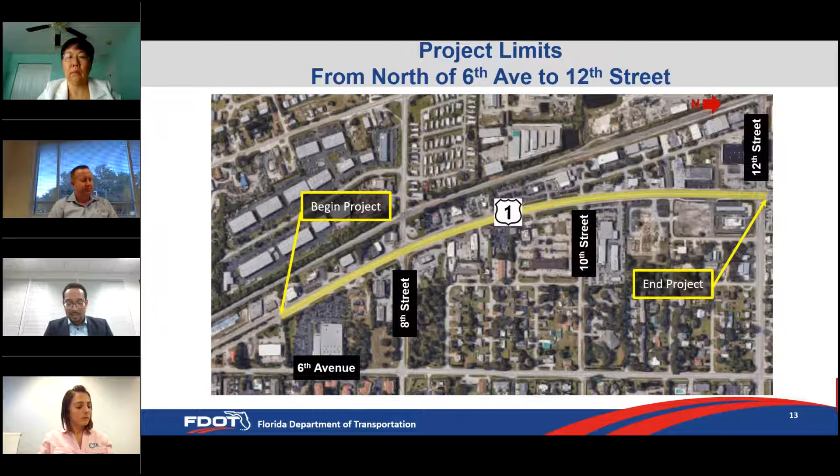So we're now on slide number 13, and this slide shows the project limits along US 1, or State Road 5, in Indian River County. The project begins just north of the intersection with 6th Avenue and ends at the intersection with 12th Street.

Okay, slide number 14. We'll give a brief overview of the project objective and some background information here. The main purpose of this project is to preserve and extend the service life of the roadway by milling and resurfacing the existing pavement, as well as to enhance general highway safety. The project objectives also include necessary pedestrian modifications to comply with the Americans with Disabilities Act (ADA) standards, addition of missing sidewalk, improvement of bike lanes, signals, and lighting upgrades.

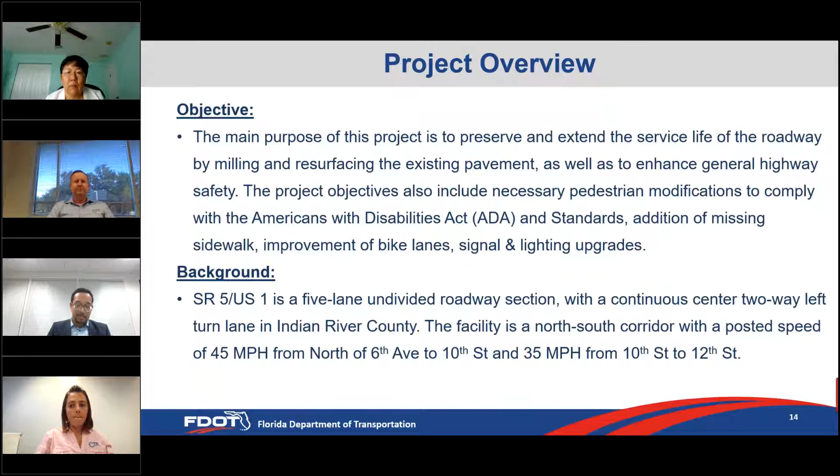A little bit about the background. Within this project section of US 1, it is considered a 5-lane undivided roadway. It has 2 northbound lanes and 2 southbound lanes, and also 1 center lane that is used for left turn movements for both directions. The roadway facility runs from north to south and has a posted speed of 45 miles per hour between 6th Avenue and 10th Street, and then it reduces to 35 miles per hour between 10th Street and 12th Street. Next slide, please.

So we're now on slide number 16. Before I begin, the project is broken up into 2 sections: one from 6th Avenue to 10th Street, which we'll talk about now, and then we'll talk about the second section between 10th Street and 12th Street.

So this section of US 1 between 6th Avenue and 10th Street, the existing roadway has 2 12-foot wide northbound lanes. It also has 2 12-foot wide southbound lanes, and 1 12-foot wide center two-way left turn lane. There's existing 4-foot paved shoulders in both directions, and there's also a grass swale on either side of the roadway. In this section, there are some sidewalks that are 5 feet wide, but there are also several gaps where sidewalks are missing.

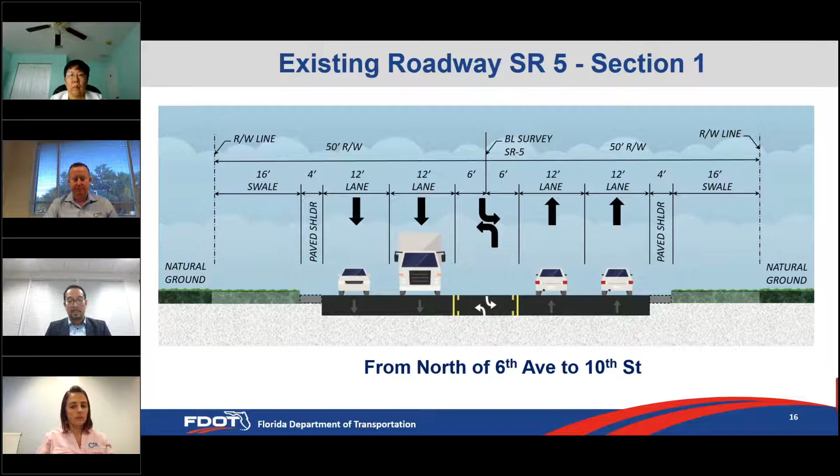So we're now on slide number 18, and we're going to talk about the second section of US 1 in this project, which is from 10th Street to 12th Street. The existing section has two northbound lanes where the inside lane is currently 11 feet wide and the outside lane is 13.5 feet wide. It's the same setup for the southbound direction, with one inside lane that's 11 feet wide and a 13.5 foot wide outside lane.

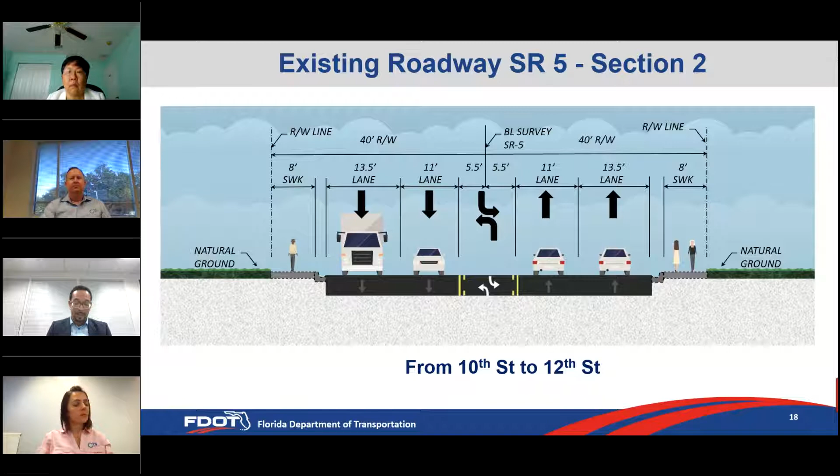This section of US 1 also has a center two-way left turn lane, which is 11 feet wide. In this section, there's curb and gutter on both sides of the roadway, along with an existing 8-foot wide sidewalk that is adjacent to the back of curb.

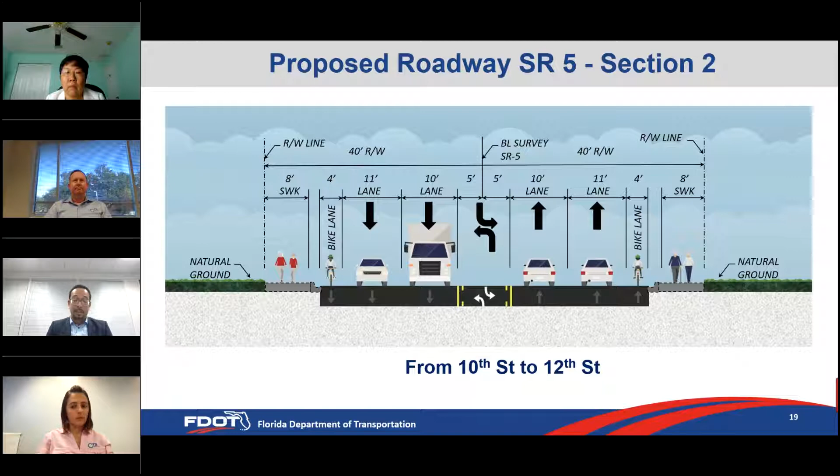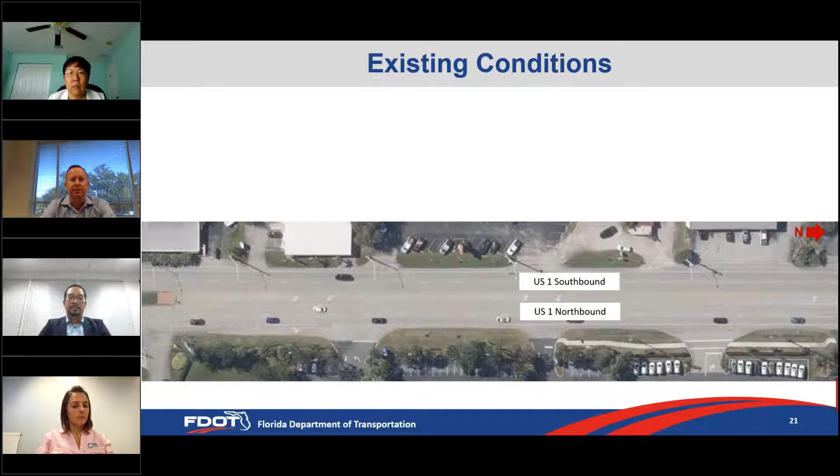Thank you, Ray. Good evening, everyone. This is slide number 21, showing an aerial of the existing conditions on the roadway. We're going to use similar aerials over the next few slides to show some of the proposed improvements.

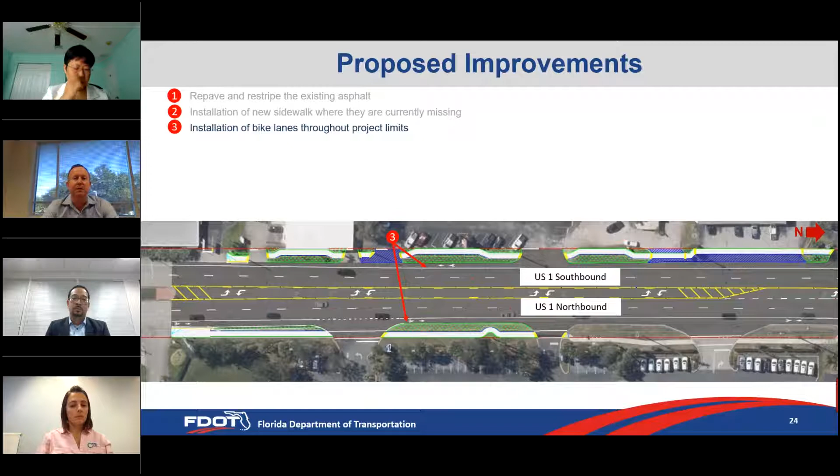The next improvement includes the addition of continuous bike lanes throughout the project limits. This will largely be accomplished when the milling and striping occurs. There will be slight shifts of the lane lines, narrowing them to allow sufficient room for the bike lanes. There'll be some very isolated areas of pavement widening to accomplish this, but it will largely be accomplished through the shifting of the striping.

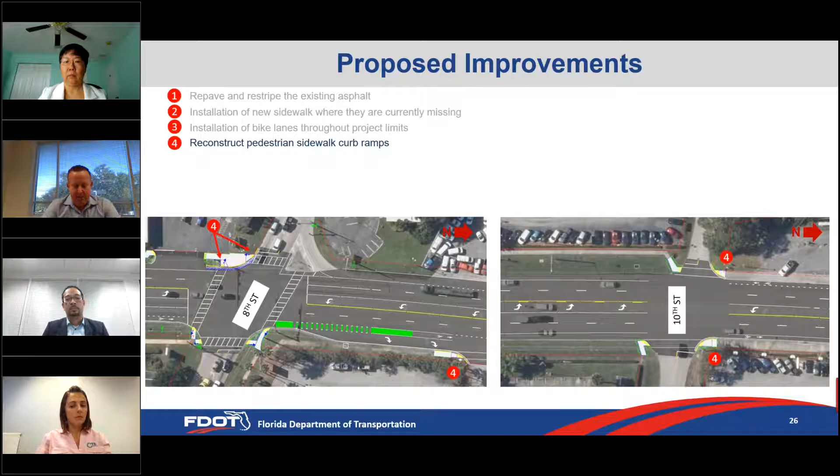We're now on slide 26. Another important improvement is the reconstruction of the pedestrian ramps. The intent is to meet full ADA compliance, which includes the slope of the ramps, their physical placement, making sure there's unobstructed clear sidewalk width. We'll also add detectable warning pads, and ramp reconstruction is going to occur at the majority of the ramps throughout the project.

This is another area showing a graphical representation of what the ramps will be like. One of the other key aspects is making sure that the ramps are properly aligned with the proposed crosswalks.

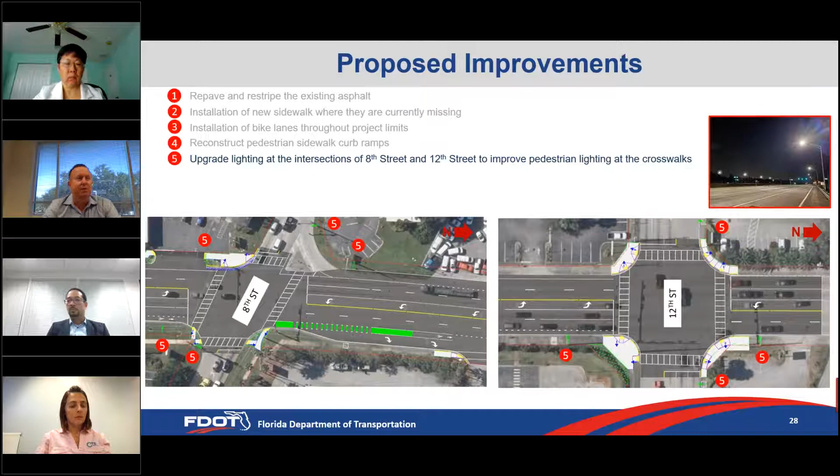This is slide 28. Another key enhancement will provide upgraded lighting at the signalized intersections of 8th Street and 12th Street. The key feature of this lighting is enhanced pedestrian safety, and it'll provide enhanced visibility to vehicles approaching the crosswalks, so enhanced pedestrian visibility.

Another important addition will be upgrade of signalization at both 8th Street and 12th Street. Once again, the primary focus here will be on pedestrian activities, so it'll include enhanced push buttons that are parallel to the crosswalks, making sure that the placement of these push buttons is within 10 feet of the curb ramp landings, making sure all crossings have pedestrian countdown signals that inform you how much time you have to cross the roadway, and enhanced signage to clearly indicate which direction the button is for which ramp.

Another improvement will be the signage that's impacted by construction. They'll all be replaced with new signage to meet the latest standards, or any existing signage that's faded, damaged, or out of compliance will be replaced to make sure it meets standards and current requirements.

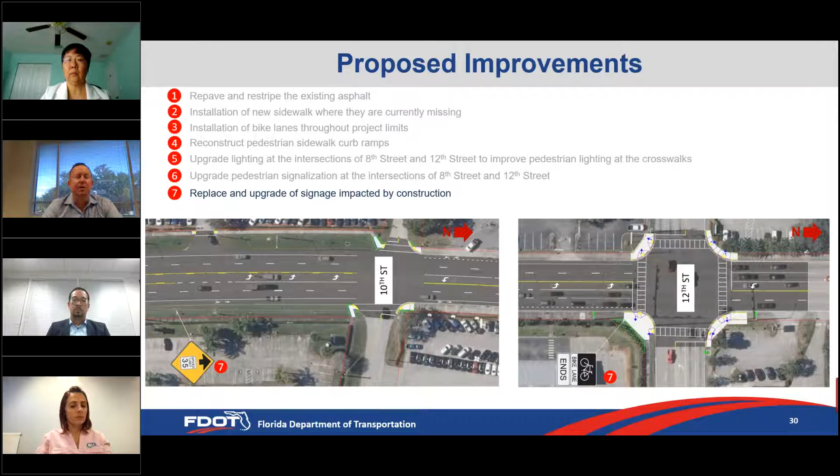Next slide, we're going to talk a little about the temporary traffic control plans for the project. This is essentially what you're going to see day to day when you're out there during construction.

This is slide 32. The work will be done in phases, with the intent to minimize and reduce impacts to the community and the local traveling public through the roadway. The regulatory speeds established are 45 miles an hour from north of 6th Avenue to 10th Street, and 35 miles an hour from 10th Street to 12th Street, and that's what exists out there today.

There will be some temporary lane closures. These will occur during non-peak hours, essentially not the rush hours in the AM and PM, once again with the intent of minimizing impacts to traffic. The major paving activities will be performed at night, and we'll make sure that access is maintained to all businesses at all times during construction.

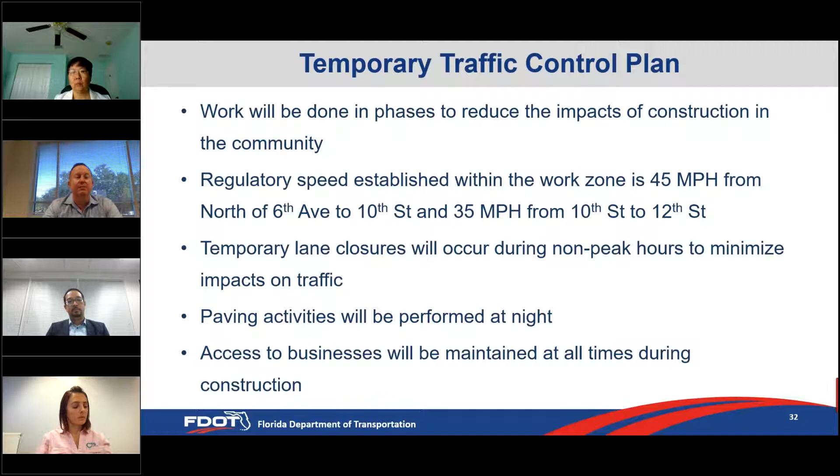This is slide 33, what we're calling phase 1. This will be the lengthier portion of construction, where a lot of the work occurs outside of the actual travel lane, including sidewalk additions and reconstruction, curb ramps, lighting work, signalization, and some minor drainage. This is where you'll expect to see daily temporary lane closures during non-peak hours, for the outside lanes only. These will occur daily and then be removed each day during the peak hour.

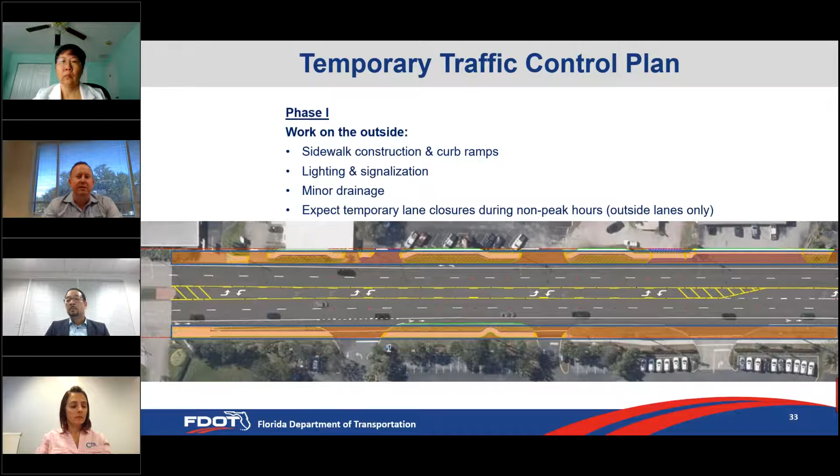This is slide 34, where you'll see work occurring over the travel lane. This mainly involves milling and resurfacing of the roadway, repaving, and providing new signage and new striping. In this case, at least one travel lane in each direction will always be maintained during construction, and the majority of this work will also occur in the evenings.

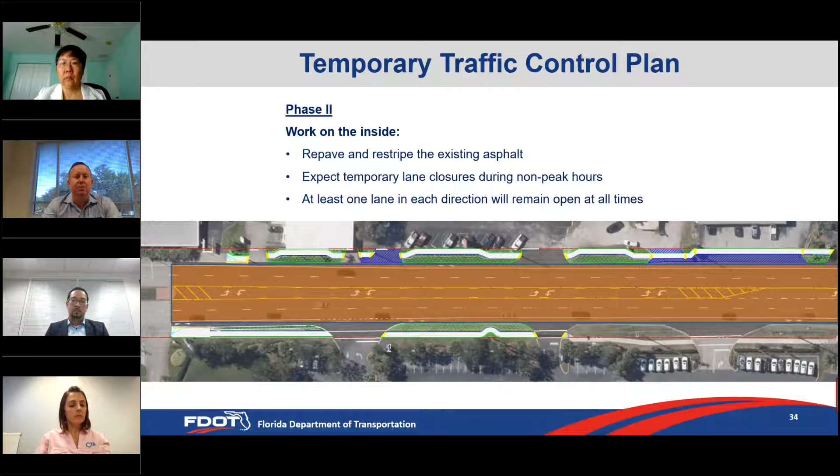Now we're on slide 37. We're going to go into the question and answer session, and I'll pass it to Layla Francois, who will give some additional information. Thank you, Steve.

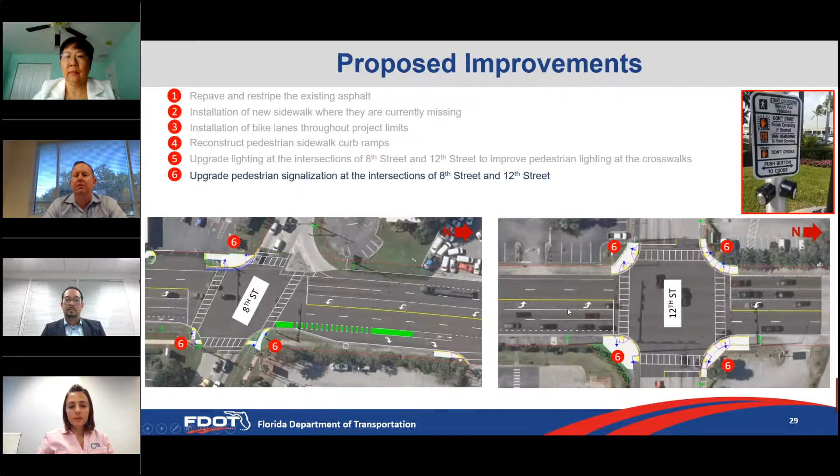This project is the milling and resurfacing project. So if, as you suggested, we cut off the sidewalk to make the bike lane wider, that means we need to redo all the drainage system along the road. Does that make sense to you?

Yes, so you're saying it's just too difficult or too expensive to do? Yeah, basically I have to use the existing pavement between the two curbs to fit the best typical section I can give. If I make the sidewalk narrower, that means all the drainage system underneath the road will need to be redone, and all the inlets redone.

Then you could move that curb. And that's not possible to do? That's just too big a job? Is that what you're saying?

That's basically like a total reconstruction job, not a milling and resurfacing job. The whole purpose of this project is to mill and resurface the existing pavement, preserve it, and make it last longer. It's not a reconstruction job, it's a totally different type of job and type of funding. The state has different funding each year for different things, so we're just using this milling and resurfacing fund to make the best out of it.